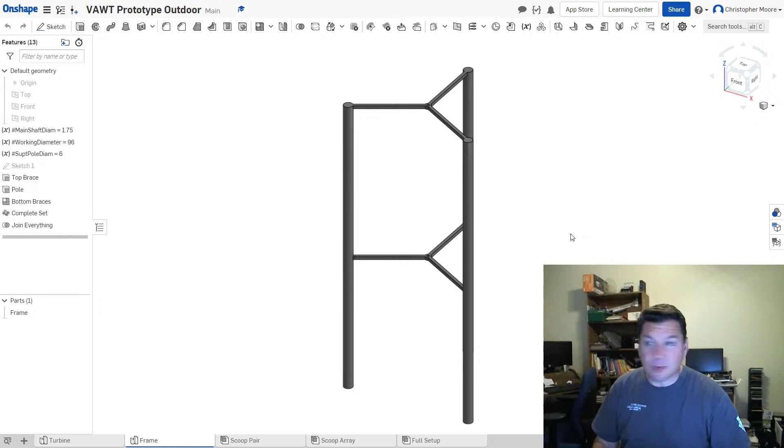Hi, Edwin. All right, cool. Number one what, Commodore? Number one to post something? Or number one as in you like the Harmony Turbines project and it's number one in your heart? Well, you weren't the first to post because Edwin came up first saying hello and that I was coming through loud and clear. So you were number two, Commodore. That's okay. We need number twos just as much as we need number ones. So Edwin gets the prize, the coveted honor of being number one tonight, first to post.

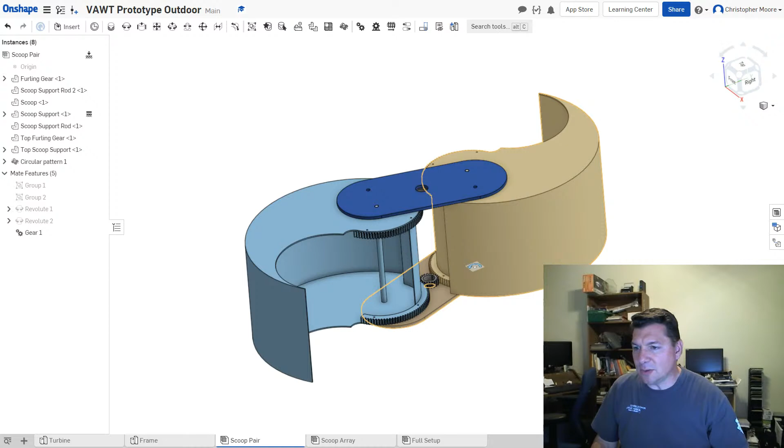Terry, hello. All right, well, I'm going to get started. I wanted to do a live stream tonight. My intent is not to go talking for an hour and a half, but who knows? You know me, I get to chattering and things get out of hand and then it gets crazy. So I wanted to share the first glimpses of the new outdoor prototype development.

I'll give a little recap for those of you who didn't get a chance to watch my other live stream the other night. I have already submitted my request to the township here in the area where I live, and asked them if it would be okay to put this turbine up, a permanent outdoor prototype, in my front yard.

The reason I'm asking for the front is because we get northwesterly wind many, many more days out of the year than we get any other wind. So to capture that northwesterly wind, it would have to be in the front yard. I don't think they like that quite as much as me asking for it in the side or backyard, but they said they are going to consider it because of the wind issue.

So I submitted my paperwork to them last week. They are going over it now. I've already got the new Harmony Turbines LLC paperwork into the state, so the state now has all of my stuff. My EIN, employer identification number, has been filed for Harmony Turbines. So we've got the state paperwork, the federal paperwork, and the township paperwork to be putting up a turbine.

I've also begun work on StartEngine.com. StartEngine.com is who I believe I'm going to go with for equity crowdfunding. And if you don't know what equity crowdfunding is, I would encourage you to take a look at StartEngine.com's website, they can help you understand it. It's kind of like Kickstarter or Indiegogo, but instead of giving out items and selling items, taking pre-orders for those items and then selling them to people, you're actually selling a stake in the company. So if you guys would be endorsing and backing up Harmony Turbines, you'd actually be in for a piece of the pie, or have some skin in the game, whatever the phrase is that you use.

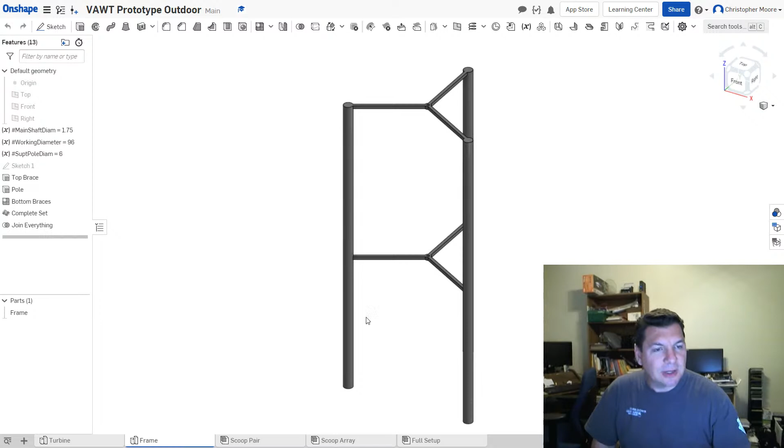So here is the frame. It's just a frame. The support beams here are probably 6x6 steel, with a 6 inch diameter pole support. This will be like 2x2 square stock holding up those two pieces in the middle, and I will probably need some diagonal supports in here, maybe not real big, but a little bit of diagonal support to help hold the lower central support up.

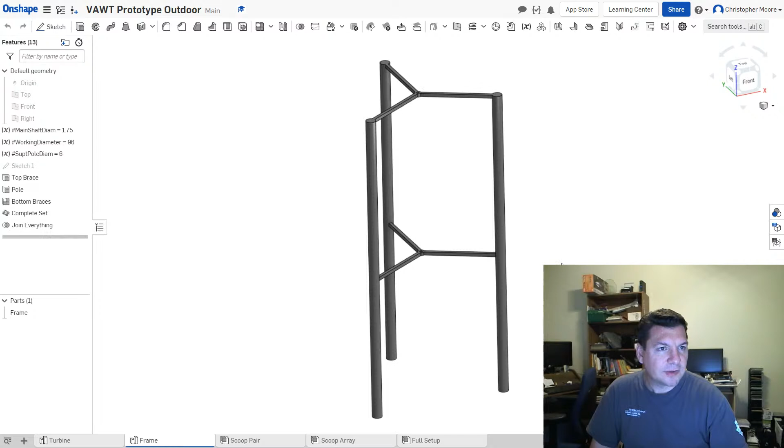So that is the frame, and then you're really going to like this. My scoop pairs, which I was showing when I started the live stream, these are the brand new scoop pairs. Terry, I might be tapping you to help me do these because I'm looking at maybe making them out of aluminum, since aluminum doesn't rust. I understand there's a little bit of a problem with corrosion if I get it up against other metals like steel, so I'll need your advice and help there when it comes to dissimilar metals. So these are the new scoops.

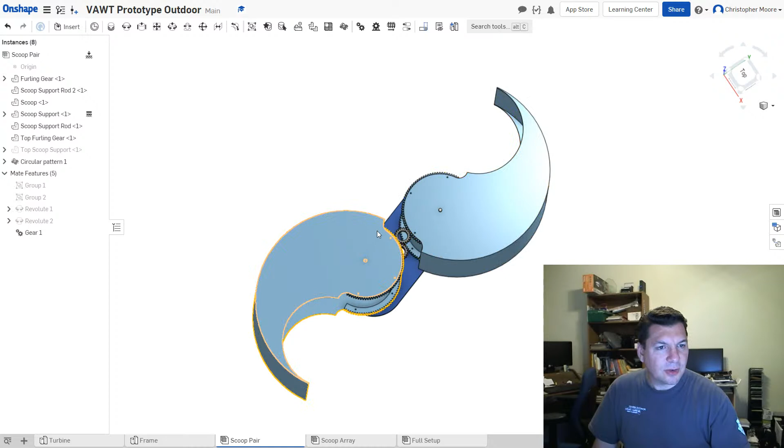They are 3 feet, so they're 50% larger than before, 3 feet tip to tip. Let me hide this top piece and I'll show you guys. If I close it up, it's easier to envision in your mind. So tip to tip, they're 3 feet, 18 inches tall, so 1.5 feet high, 3 feet in diameter, and they are beautiful.

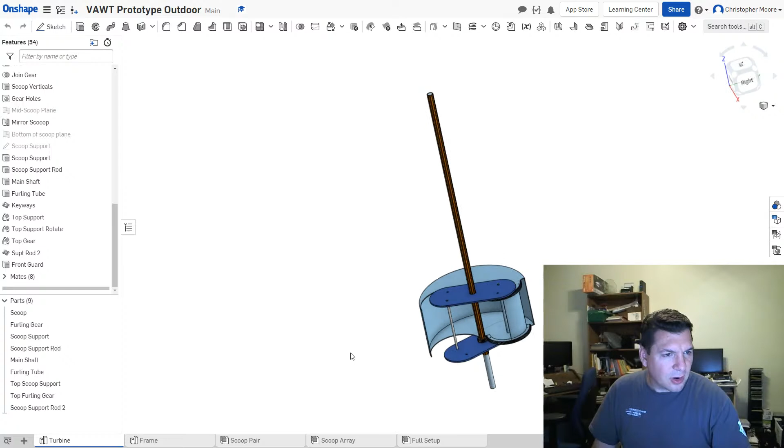There's also a new feature that I've added here. You'll see that front scoop has what I'm calling a wind barrier or wind break. What did I call it here? Front guard, I just called it a front guard, and that guard on there is movable. If we're looking at the scoop pair, let me hide the one so I can show it to you better.

Isn't CAD amazing? I freaking love CAD. I learned how to do it just two years ago, maybe two and a half years ago I started. Could have even been three years ago, but I was horrible at it. I played a little bit with SolidWorks, but since I got Onshape, Onshape.com is amazing, and it lets you do so many cool things with it.

This wind guard that I have, the front guard, what did I call it? Now I can't even remember, I just said it a second ago. I am so bad, I just called it a front guard. It's like a football player.

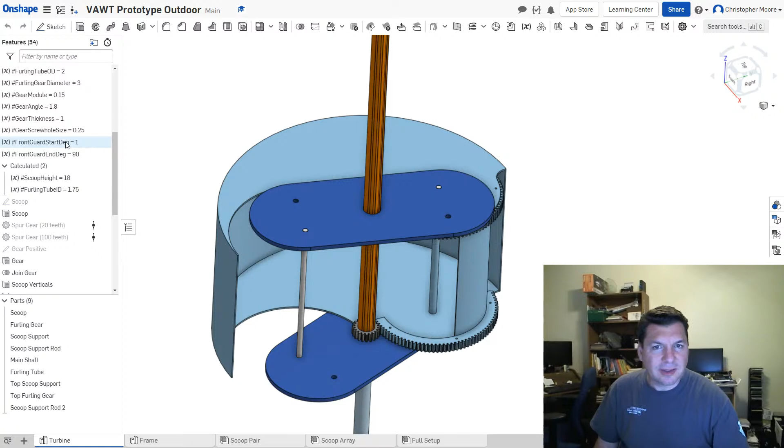This thing, I have it on parameters, so I can move it around at will. Right now I have the front guard starting degree at 1, so that means it's 1 degree off of the edge of this gear, and on the other side, if I had the ending degree set to 1 degree as well, then this guard would go all the way over. So right now, if I set this at 1 degree, the front guard would fill that entire front space.

Thank you, Terry. So see how that front guard now, by me changing that one parameter, has just filled that entire front space instead of just 90 degrees. But if I undo that, I have it only filling half. So the cool thing about this, by parameterizing things, I can play with this guard.

I could say 20 and 90, and then it would make that front guard just be that little bit. It would start 20 degrees off of the edge of the gear over here, and I have it ending 90 degrees off the edge of the gear over there. So I can move this guard around wherever I want.

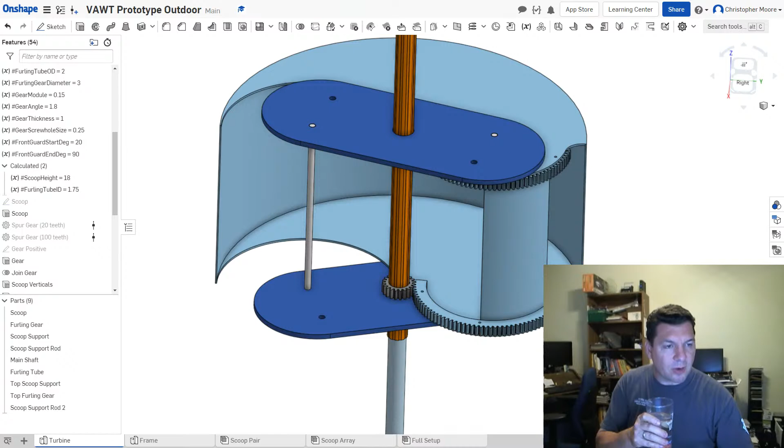My intent was to play with it visually, and then maybe one day when one of you guys who's really good with computational fluid dynamics, CFD, is able to help me out, I'd love to do some CFD on this, and we can find out where the best position is, how big to make that front guard, what angle to put it at. I do think we need one in, so right now my best guess was about 90 degrees, starting at the edge of the gear to there.

And the reason I did that, let me unhide all the instances here, is because as it spins, if we imagine ourselves being the wind blowing straight in here, as it's spinning, we get too big of a gap if we don't have some kind of a guard in there. So the pole is going to be in here now, so you're not seeing the pole.

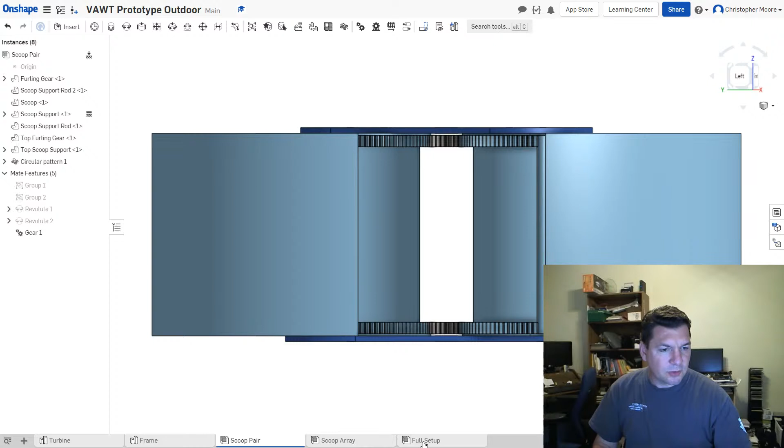Actually, let's move over to, oh my, get ready for it, guys. Here it comes. Woohoo! Look at that. Oh my goodness. That's the full scoop array. And what I was playing with here is just what looks good for that front guard.

Oops, that won't work. So if I animate this right now, I was trying to figure out what optimal angle to have that, how big to make that front guard, but I need to fill in that gap a little bit when that front guard's in there. And see here, harmony spinning, that would be like an incredibly slow, like half-mile-an-hour wind or something. Nah, maybe that would be like 1 mile to 1.5 mile an hour wind.

But if I zoom in on that, you can see that guard is helping to funnel the wind around there correctly. So I'll try not to rotate it too much and make people seasick here.

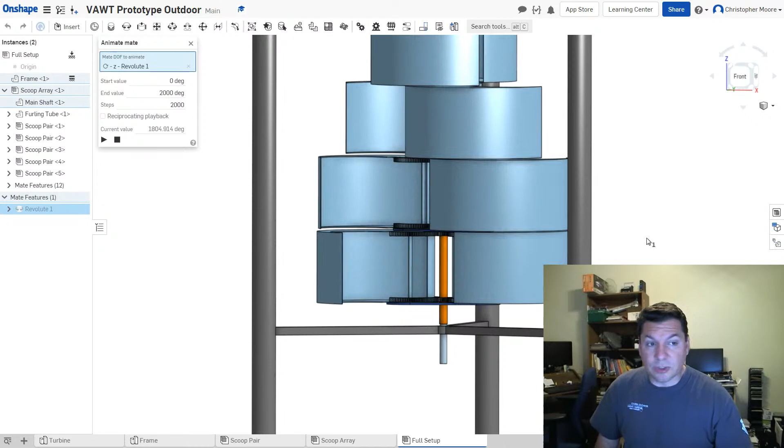But computational fluid dynamics or real true field testing is going to be the only way to determine what my optimal setting is for that front guard, where to put it, how to position it optimally. Maybe it needs to be back a little bit, maybe 20 degrees off of the one side of the gear, or coming closer to the other side. Who knows? But I've got the easy parameters in there.

In fact, in the field, what I could do is just put some screw holes in the back of the gears and then have that guard actually movable so that I could replace it and put in different guards once we do computational fluid dynamics on it, and we could see through CFD what appears to be the best placement for that guard. But I do think we're going to need one in there.

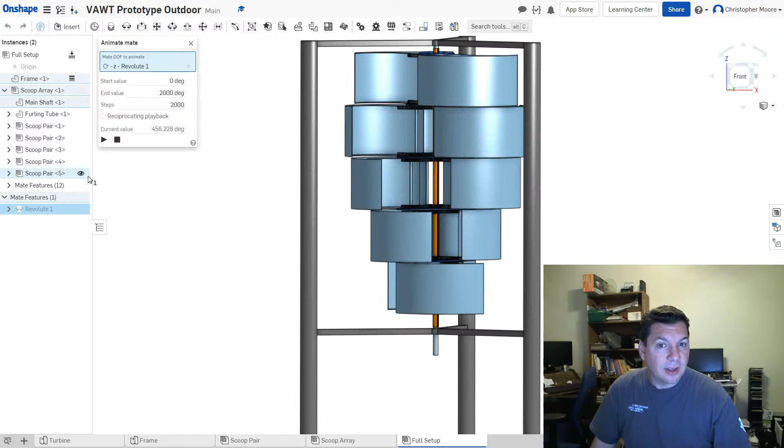So this is how it looks. Let's show you like more of a top view there. Pretty, actually really freaking cool. Straight down on top, that's what it would look like.

And right now, I've got it, if I would freeze this main shaft, and let's open these scoops up. So now they're open 100%.

Be nice if this remembered your last animate setting. Oh well, not a big deal.

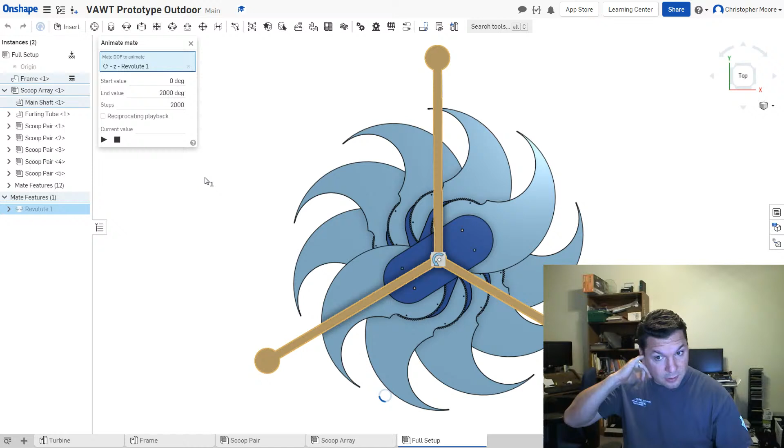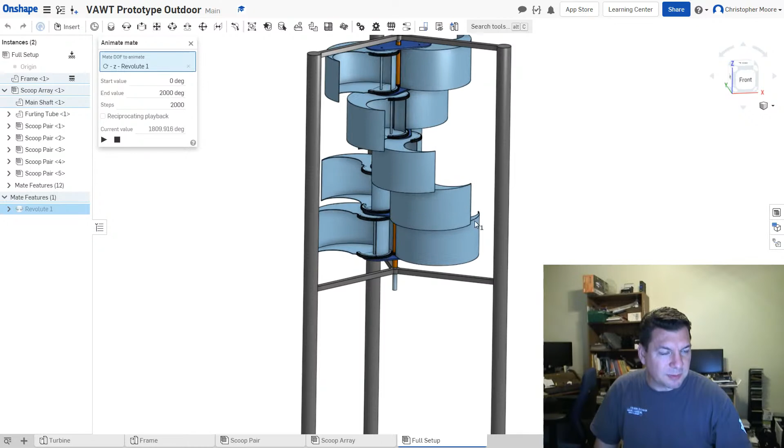But there's what it looks like when it's fully open. And if you're counting, you'll see that there are 5 scoops in there, guys. I've got 5 scoops in this array. So this is a 5 scoop array. It would be 7.5 feet tall, starting at the bottom of the scoops to the top. Actually, a tiny bit more than 7.5 because of the scoop supports in between, those dark blue pieces in between. They're a 1/2 inch thick each. Yeah, I think I made them 1/2 inch.

What's awesome about this rig is it's going to be permanent, sturdy, and hold harmony very rigidly. From the middle supports down to the ground is almost 8 feet of space, so I can mount whatever kind of crazy hardware I want underneath there, trying different generators and gearing ratios as necessary.

I keep bringing up the fact that I saw one guy who had a universal joint from an old car coming down off his center shaft at about 45 degrees, connecting to his generator. That's really cool because you could mount a generator right onto this pole for rigid mounting, then come off it to another generator, and just change the universal joint to test a third one. The universal joint was pretty neat, super low tech but a cool idea.

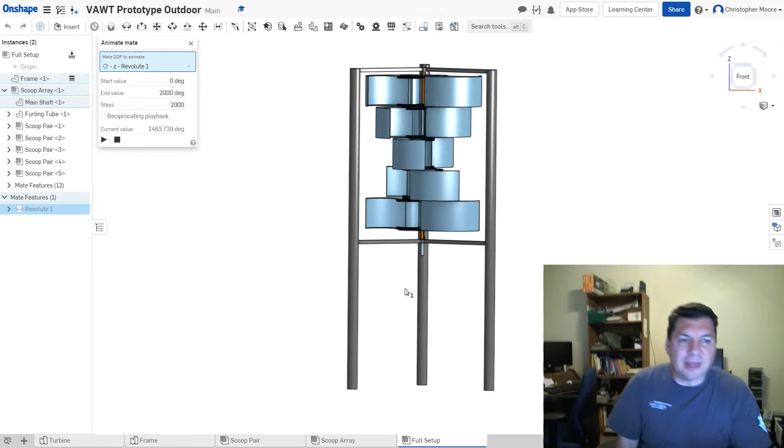The thing I'm excited about is all of the space down here, because I never had that before. In my other model, the white one I took outside, I had maybe 6 inches of space in there. It was painfully small down in that bottom area, not enough to really work with proper generators.

I didn't know it at the time, but coupling your turbine with a properly sized generator is a bit of science and a bit of art. It's not something you can just throw together and expect to work perfectly. Your generator spins at a certain RPM range where it's efficient, and the turbine spins at a range that's most efficient for given wind conditions, so coupling those two is very important. Then on top of that, your charge controller plays into it too.

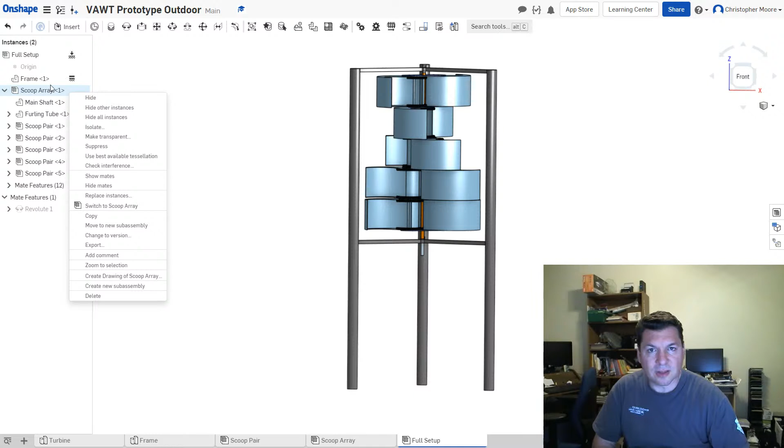So lots and lots of things play into this. Having the room and space down here with a permanent outdoor prototype is going to be key to making good, strong headway figuring out the final numbers and performance of Harmony, and all the stuff that goes into this.

Sorry, Mom. That was my mom calling. I told her earlier I'd have to decline because I'd be doing a live stream. Let me tell her quick. Told her she can watch me on YouTube if she wants. Anyway, sorry about that, I knew she was going to be calling, she was trying to get a hold of me earlier. Back to what I was saying.

Thank you, Mike. Let me catch up to a few comments here. People are saying, wow, it's cool, looks fantastic. Someone asks: do you know if the front guard will cause any wind noise as the wind leaves?

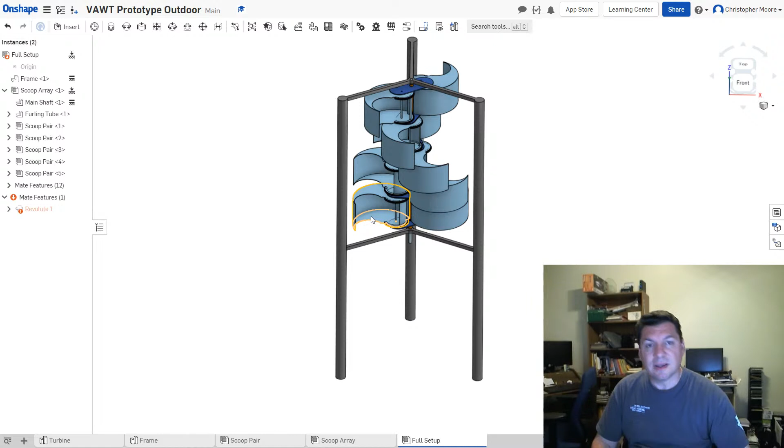No, Mark, at this point, no, because I haven't even built this model yet. In the white ones that I had, let me pull that up, I'll show you a quick video.

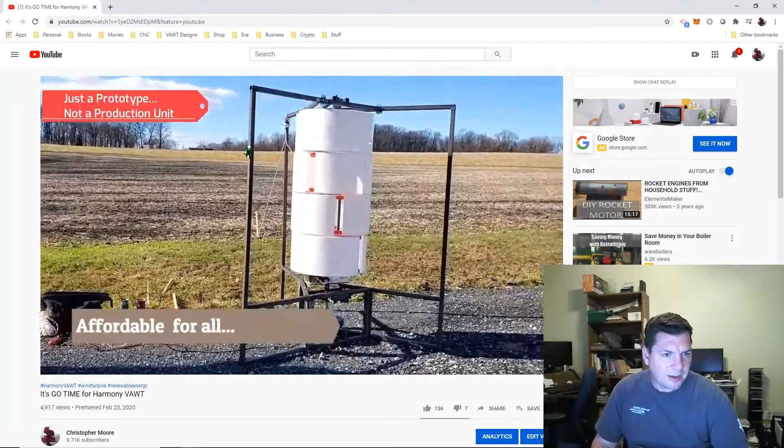I was thinking it was like 6 inches, maybe about 8 inches, but certainly not enough to mount other types of generators in there. It was barely enough to get just that one little pancake generator in there, no room to mess around and do other things with it. This scoop array, when fully opened, was 4 feet wide, 4 feet tall. The new one is going to be 6 feet wide, 7.5 feet tall, and that's really big.

Probably it's a little bit larger than I want to end up for a residential size, but it doesn't matter. I need a starting point. So if bigger is a little bit better because it's easier to work with and gives me more torque, that's fine.

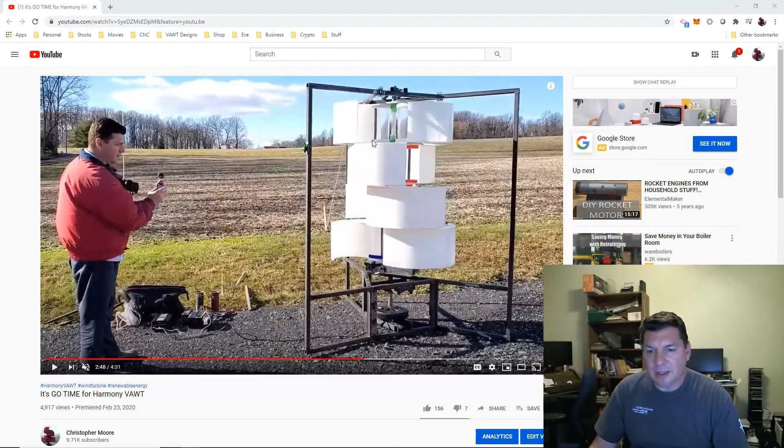I can play around with all different kinds of generators then. But in the old one, to answer your question Mark, that front guard was pretty much 180 degrees. It went from the beginning of the gears all the way to the end of the gears. And the new ones that I'm proposing, I am looking to keep them smaller. If I can get away with just 90 degrees, then that's what I'm going to go with.

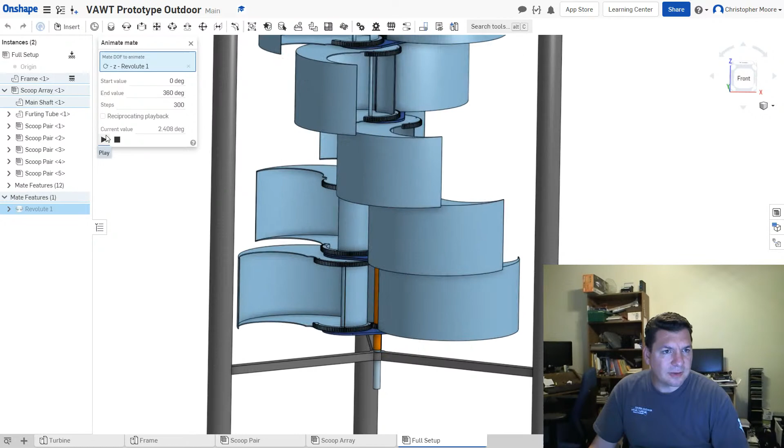The whole thing here, when you look at it as it's spinning, when it's fully opened, you don't have anything to worry about with that gap. So you really don't need a guard if you're just going to stay fully open. But as soon as we start furling, then that guard comes into play. When it's fully open like it is right now, that guard really isn't going to do much.

So that's why I don't want to make it bigger than it needs to be. That's why I'm not just going with a 180 degree guard, because I'm blocking a fair amount of this scoop that's catching the wind. I want to have it as minimal as possible, but still do its job.

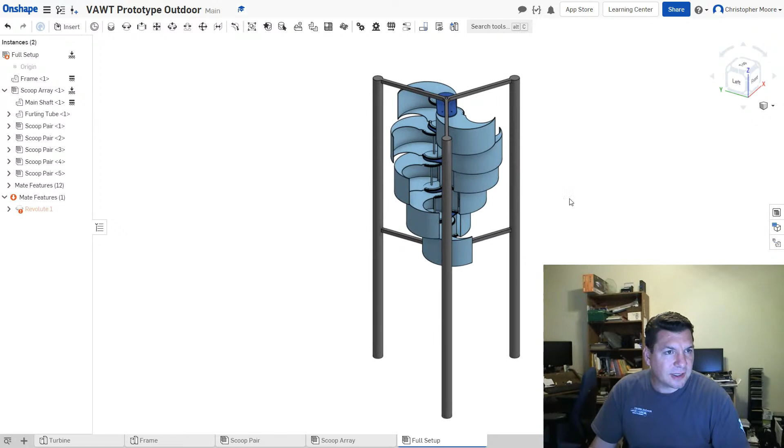Once I start furling, like if I would furl a little bit here, maybe we'll furl up just... that's like 80% opened right there. So it's only 20% furled. You'll see, if we get it at a certain angle, it's a little bit hard to angle it at the angle I want. There we go. You'll see how that really starts opening up that gap in the middle there. It really begins to open up that gap, and that's the problem.

Let me see if I can rotate it just a little bit. There we go. See, without that guard, there's really a very, very large gap in there. I'll take the guard away once, and you'll see what I'm talking about. It's a horrendous gap. If I suppress that front guard.

Isn't CAD amazing? Look at that. I just did what would take you 3, 4 hours to remove those front guards. Even if they were just in there with 2 screws, it would take you a while to get up there and unscrew each one carefully without breaking things. But see how much it's just opened up so much without that front guard. I think you'd lose a lot of efficiency in here.

That's why originally, as I was designing the tabletop models, those orange and white ones that I had on the dining room table, I thought, oh, I don't need a guard in the front. But I believe I do, because those tabletop models were fixed in an open-only position, 100% open position, the ones that I did the videos on. That's why I couldn't really see it. But as soon as I got it into CAD and started spinning it and having it furled a little bit, it becomes very clear immediately that you need to have something.

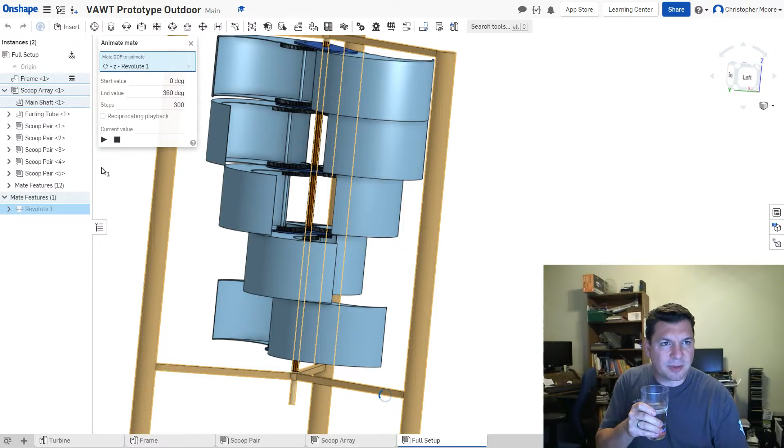I'll keep it at this angle so you can see. See how those big gaps keep opening? I think I'll try it without the front guard just to try it, or we'll do CFD on it as well, but I think you're going to lose a lot of efficiency there by that big gap. So that's why I have the guards on.

Thank you, Terry. So Mark, that was my long-winded way of answering your question. I don't know yet, but we'll find out. That's the beauty of getting to play with it. And Terry, yeah, I don't think it needs to be 180, but I think it needs to be probably somewhere close to 90 degrees, and then where exactly we position it, we'll have to play with that.

So that's the beauty of what we get to see here with CAD. Some of the other cool things I'll show you.

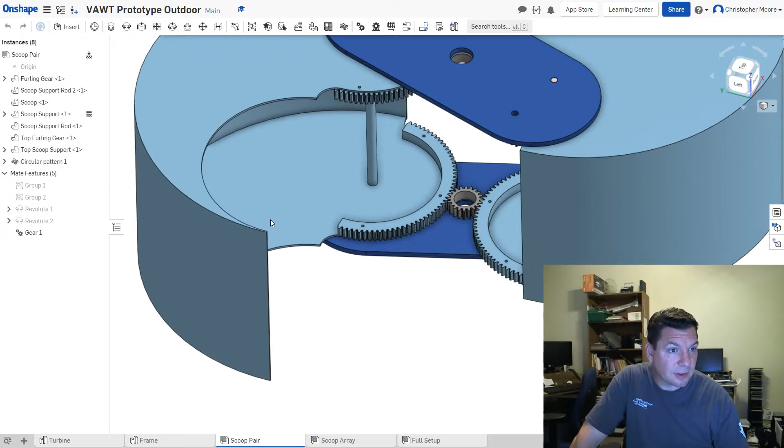Oh yeah, you can really see it there. I'm furled up like, in this shot, I'm furled up pretty heavily. I'm probably 60% furled at that point. So I'm below the halfway point. There's the halfway point of furling. I guess right there is exactly halfway at those two marks. And you can see that massive gap that you would get every single rotation, twice per rotation actually, you'd get that huge gap.

So if we add that guard back in, put the guard back, and then we look at the scoop pair without moving a thing, now you can imagine with that pull in there... no, I didn't have the pull in the grouping here.

Well, you can imagine with the pull in there and the furling tube, that gap is almost completely taken up. Almost. So I believe that's going to be a lot better with that guard. But even if those guards were 180 degrees, they wouldn't do anything more than what they're doing now, because they're already extending as far front as they can be. In fact, if they were continuing around to the front of the gears, I'll rotate it a little so you can see what I mean. If they were coming all the way around to the front, I think the guard would actually hurt more than help by being 180 degrees.

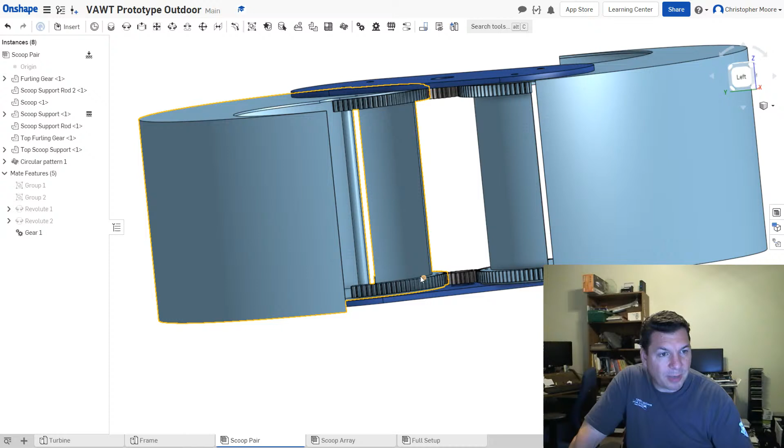So at 90 degrees right now, that wind is able to come into this spot right here and get caught for that moment as it's spinning. And computational fluid dynamics will help prove that out. But that's why I think a 90-degree guard is going to be best. We'll just play with where exactly we would position it. Maybe it could be slightly less than 90, like an 80-degree or 75-degree guard, but something closer to 90, much more so than 180 degrees, looks more correct to me.

All right, so with that guard in there, now you'll be able to see when it animates again. I haven't changed the angle of this shot at all from what it was when that big gap was there.

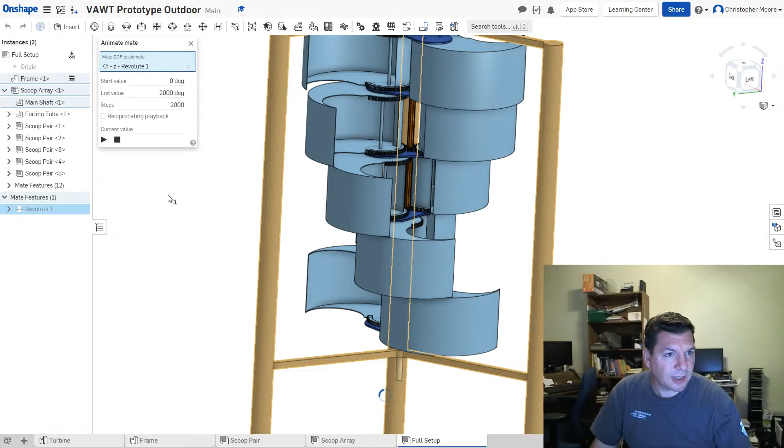And you'll see with that guard how much it helps to really close that up. So there's very minimal moments where you would have that air being able to get through there. I think that guard really does a nice job of both maximizing the scoop capture, the momentary scoop capture, whatever it would be called, and then giving us a lot of protection for any air that would have gone through the middle there. Sorry, I paused - I was just looking at the way that looked.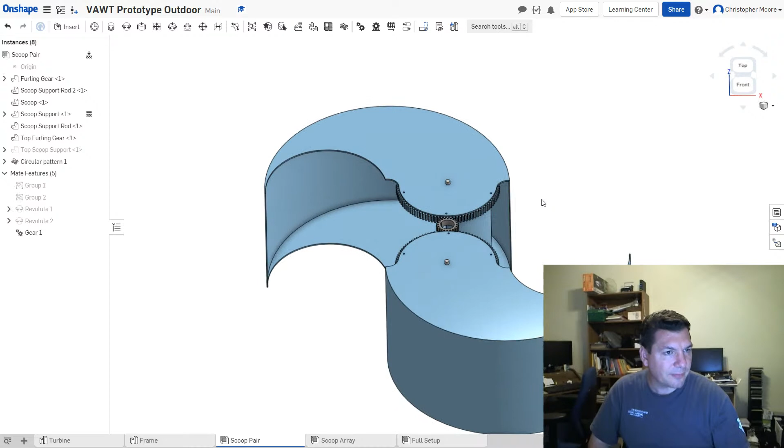And with the scoop pair, it's kind of cool too, because if I hide this top one and do a top-down shot, there's an interesting phenomenon - by having the back vent opened here, I believe we're also going to get some shuttling of air when you've got the scoops in about an 80% open state, or 20% furled state. I think as the wind enters one side here, if you follow my mouse, it's going to flow around because it follows the scoop. When it hits, it's going to flow around and shoot out this opening here, right here, like a vent.

And then it's actually going to shoot it into the other scoop. So that's why I don't want to make the guard any bigger - in fact, even at that degree, it's starting to block it. If it were more like that, then it would shoot out of that scoop and into this other scoop. So the wind would come in, shoot through, and come out. This actually helps to propel this back scoop, the one coming into the wind - it helps to push that scoop through the wind even harder.

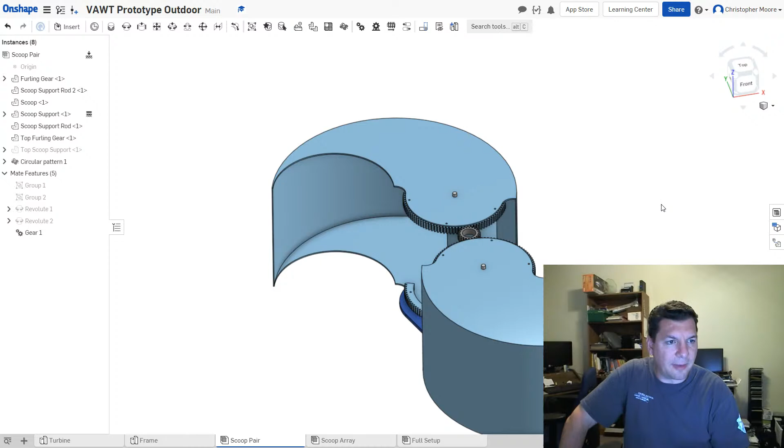That phenomenon has been noted by computational fluid dynamics and demonstrated in Savonius wind turbines for years and years. So we actually get to take advantage of that bit of a helping hand, if you want to call it that, because Harmony exhibits Savonius characteristics with these blade designs. It's both Savonius and Venturi effect fluid turbine kind of combined into one. I think Harmony is amazing, and I can't wait to start proving it to the world.

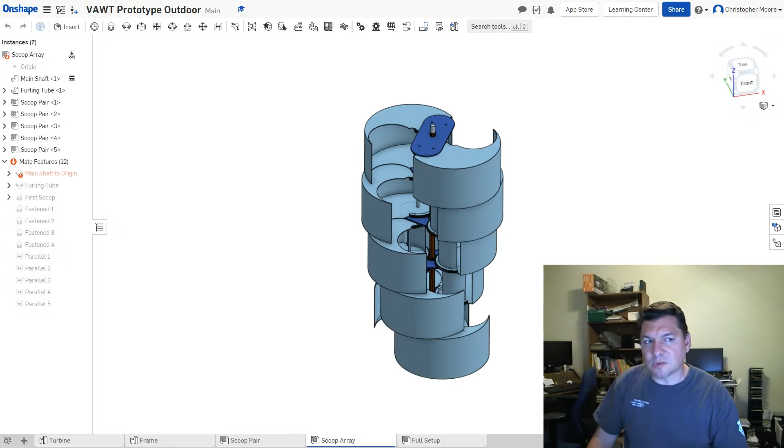But what I really want to see is when we have wind and we're producing, then I want to play with the furling state - opening it slightly, closing it slightly, playing with that front guard positioning - and see if we can get some really interesting numbers out of Harmony after we see what furling states appear to produce the best power output in given wind speeds.

So, if you could duct the wind into the cupping side and increase wind speed. Don, that is what I was just describing. Maybe you were coming in a little late, but I think that's what I was just describing to people - ducting it into the other side there.

Hello, Don, by the way.

So anyway guys, that's it in a nutshell. I didn't want to make this really long, we've already been on for over 30 minutes talking. It's a 5 scoop array, about 7.5 feet tall, 6 feet wide.

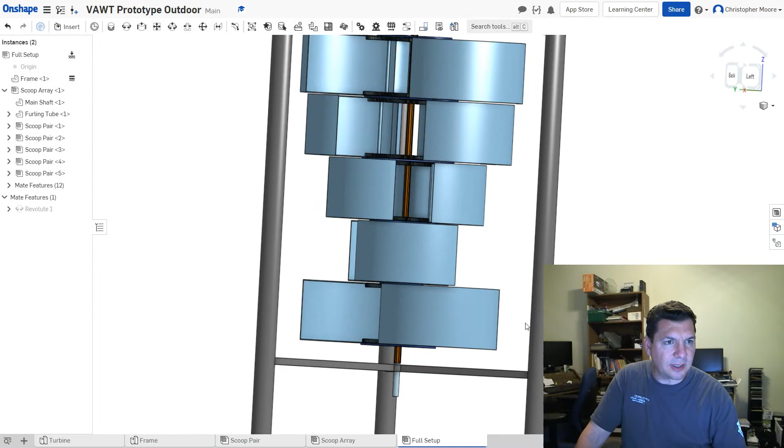When it's fully open, fully unfurled, I will put it back into a fully open state one more time and show you, for those of you who might have joined late. So there it is, fully opened.

And if we get the cross section, there we go, where it's not being obstructed. So this scoop right here at the top and the bottom are about fully perpendicular to me. It would be, or tangent to me, I guess that would be tangent.

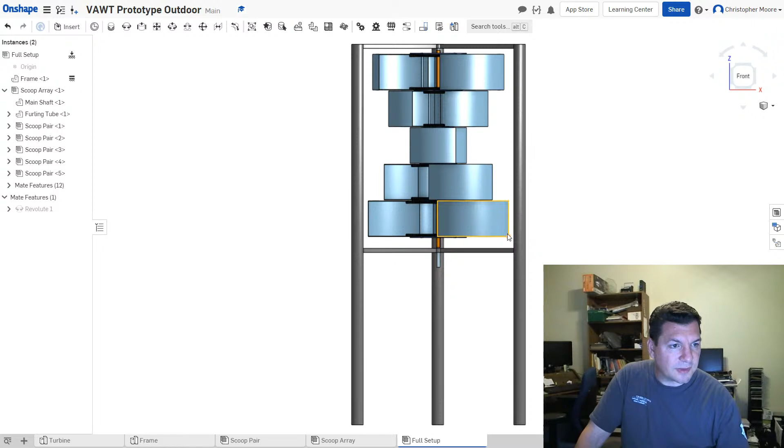These will be from tip to tip about 6 feet across. So 6 feet across there. The poles themselves are mounted on an 8-foot diameter to give it enough room so that as it's spinning, we don't get anything hitting. So you can see it spinning from the top. So nothing will hit.

That's fully open, that's as big as it can go, and it's still got plenty of room in there so that it won't hit anything. And then we have plenty of room down below to play with Harmony.

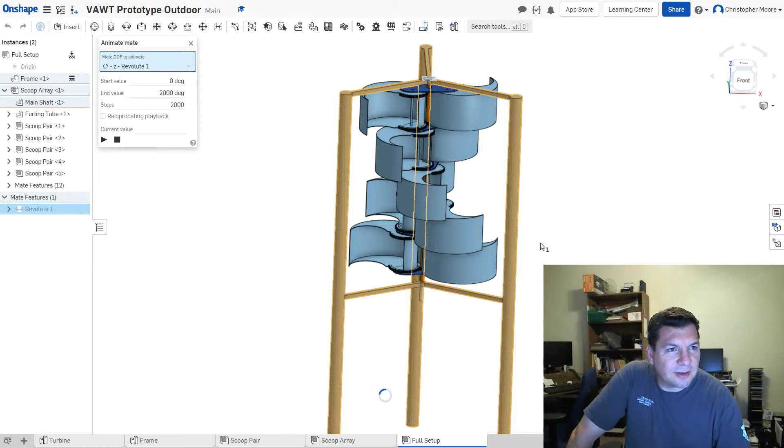I hate this, gotta make it bigger so it doesn't stop. So I'll have to send in a feature request and ask Onshape to remember your degree for the animate.

Anyway, so we have all that room down below to work and mount generator and any type of gearing or pulleys, whatever we want to do in there. So you can see it's got plenty of room, and it should give a lot of rigidity with this frame structure.

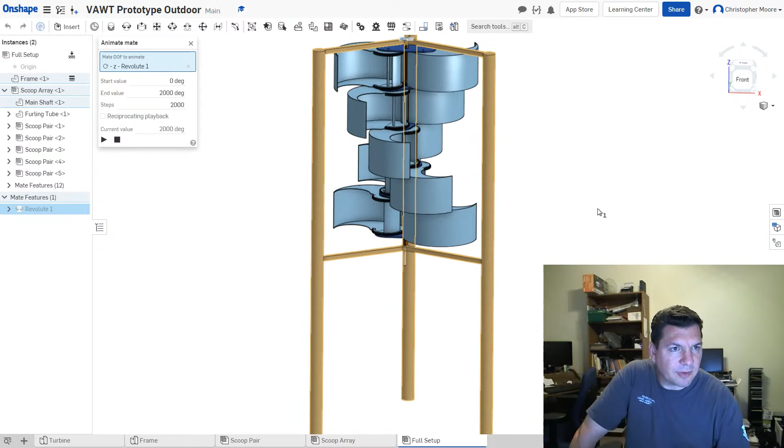And like I said, I'll probably put 45-degree supports in here, maybe 8 inches down or something, and have it coming up to about the middle, something like that, just to give me some extra stability for the weight of Harmony, of the turbine scoops, to take care of that extra weight.

These gears are going to be, I believe, I'm going to water jet them. So we'll cut the gears out with water jet, and I think water jet will actually be able to give us enough resolution that these gears will be just fine in this. By making it larger, believe it or not, things like water jet now become the perfect choice.

I don't have to actually have parts machined for an expensive milling operation. We can just water jet these gears right out of 1-inch aluminum or 1-inch steel, whatever we decide we end up having to make them.

I'm going to try aluminum first. I think aluminum will be fine, but we should be able to water jet these gears right out, and that's slick. When you think of that, that really, really, really will cut down on manufacturing costs and everything.

We can water jet those gears out, then we can just drill and tap these holes. Well, the water jet can put the pilot holes in, and then we can just tap them. So when you think about how freaking cool this would be to manufacture and get into low volume manufacturing.

Because we're just initially going to be making enough that we can do the testing we need, and then maybe get a couple out there to some of the early investors who paid enough that wanted to be a beta site. Low volume production where we get a couple of these out, probably a dozen or less, and get these out in people's hands so that they can start testing and validating data and performance and production and everything like that.

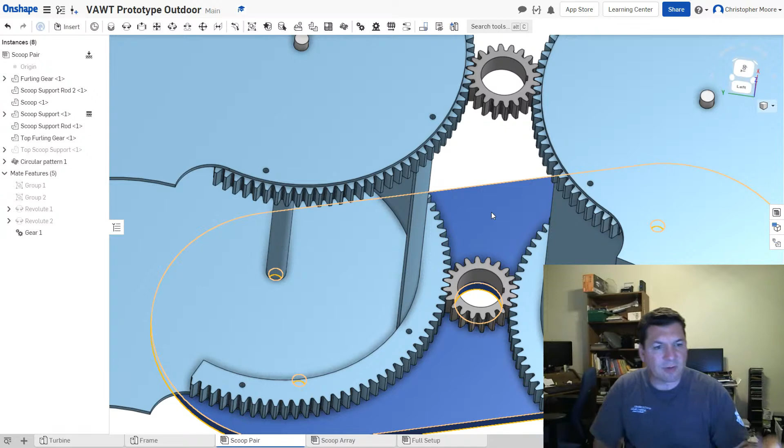But by having these gears as large as they are now for this new version, yeah, it's really exciting because we can just water jet those gears, and that's pretty sweet when you think about it.

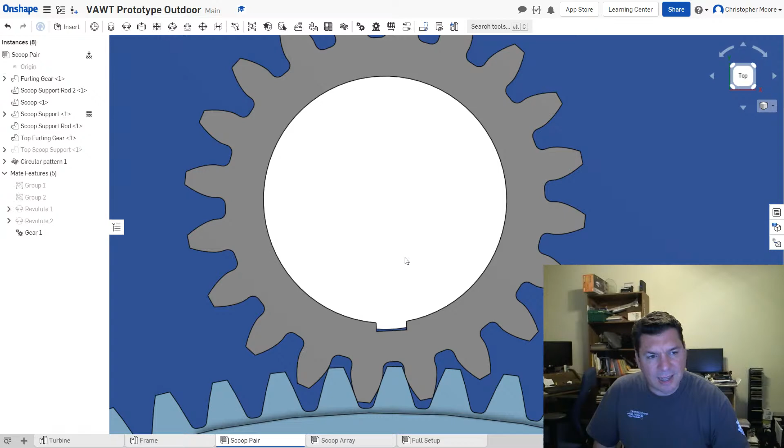We'll probably still want to broach that keyway just because that's a very delicate thing, and I don't think water jet would give us quite a sharp enough result there if we water jetted that keyway out for the furling gear. I believe that's going to still be a broach process because I didn't want to make that keyway too deep. It is right now a 1/4 inch wide and 1/8 inch deep into here.

Obviously the other 1/8 inch, if I go into the scoop array and look at it from the top, let me hide a few parts here, hide the furling tube.

Hide the main shaft. There we go.

Now in the real one, there's not going to be 5 keyways in it. I just do 5 keyways because it gives me, in CAD, a way to attach each of the scoops onto their own keyway.

So I did, maybe it's only an 1/8 inch deep. I'm sorry, I was saying the wrong thing. So that's a 1/16 of an inch in the gear, and then a 1/16 of an inch in the furling tube, to give me a total of 1/8 inch deep key by a 1/4 inch wide key. So the keys should be sufficient.

The furling gears are going to be taking some torque, definitely, especially in higher winds. But I didn't want to cut away too much meat here, coming in a whole other 1/8 inch. That would have brought this keyway down to here, and I didn't want to hurt the integrity of that gear that much by getting a 1/4 inch by 1/4 inch keyway. So I stuck with an 1/8 inch by 1/4 inch keyway and a key.

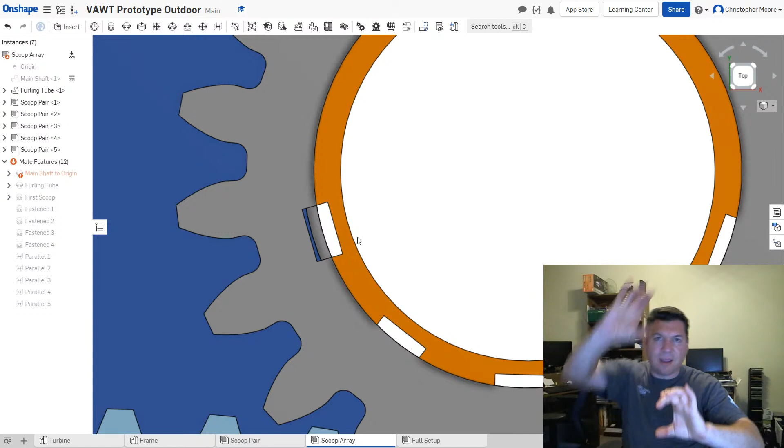And then 18 inches away for the upper keyway, it has it, and that just repeats. So the tube will have all of the rest of the rigidity and integrity fully intact, and just the small portions where we cut out the keyway are the only places where we disturb the integrity of it.

Terry, I'll see you tomorrow. Take care, thank you for joining. Michael, I know you want to test one in Tasmania, so we'll see how we get on with investments and see where we go from there.

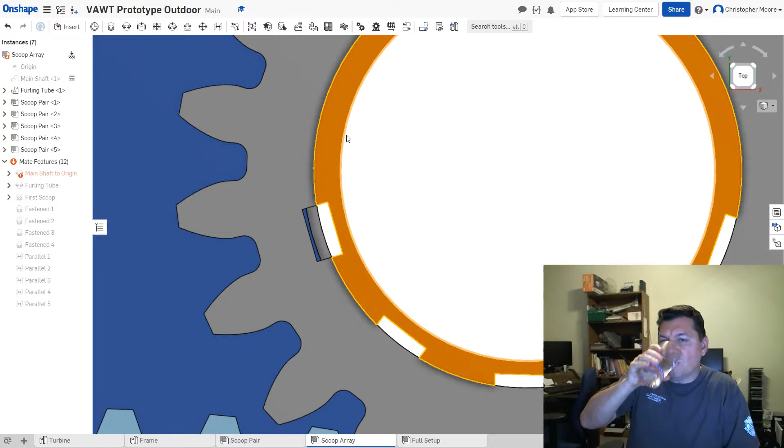Don, let me read your thing. Ducting the wind into one side only. No, Don, no. Let's back away from that idea.

People have tried to push me into that for a long time. There's all kinds of inventions out there where people are doing big ducting, heck, I've seen people using plywood to duct it into everything. You can't do that without destroying the beauty of what Harmony is. When you see Harmony rotating and spinning, it's beautiful to look at. And in my opinion, clean energy should be beautiful.

It should be something that people want in their front yard or on their roof, around their kids, not something they're having to hide away and put out in the mountains somewhere where they don't want to look at it, and then pay for someone to pipe it back into their house and pay for distribution and all that. Harmony should be beautiful.

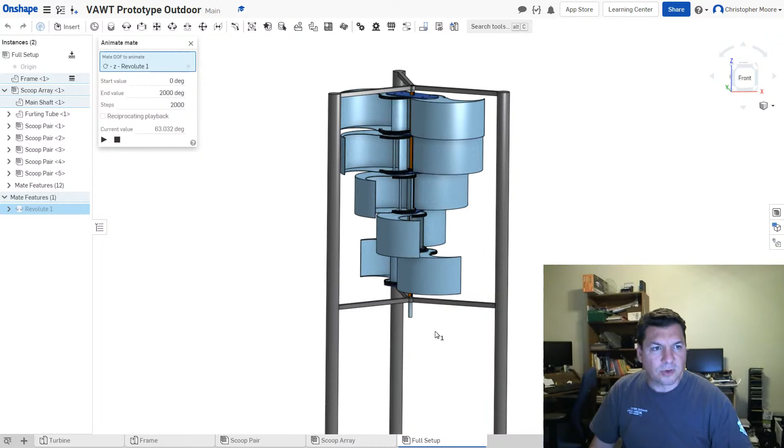In fact, I don't even want to have a frame around Harmony if it can be helped. Once we get into production, I'd like to start testing on making whatever support tubing coming up to the center sufficient enough that Harmony won't need any frame around it at all.

So absolutely not, I'm not going the way of ducting anything into it, because if you try to put ducts around it, you've got to either put the ducting on a big huge swivel or have it permanent, and then you're having to guess where the wind is coming from to duct it in, or you get those ones I've seen where they have a whole bunch of ducts all around and you can't even see the turbine.

Then you've got a big huge industrial piece of equipment in your yard and not something beautiful. Right now, Harmony, if that were spinning in my front yard, to me that's beautiful, and I don't want to destroy that. So thank you for the suggestion, but I am absolutely not going in that direction.

If you want, I can send you a couple links of people who are looking at doing ducting and playing around with that. I believe they have 4 or 5 different models that I've seen where people are playing with ducting into vertical axis wind turbines. I don't think Harmony is going to need it.

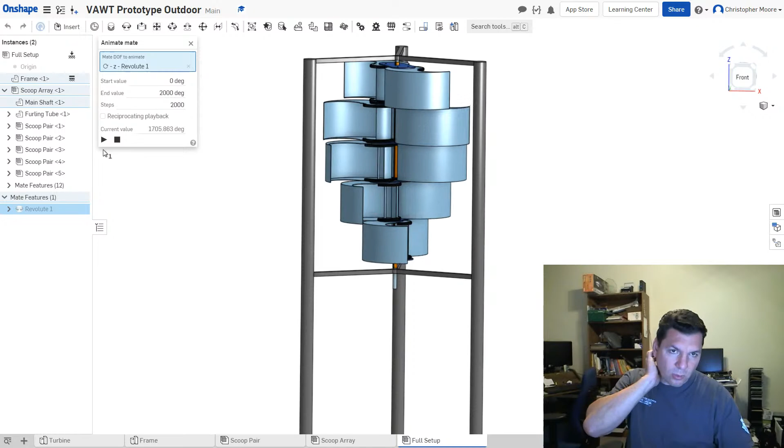I truly don't. From what I've seen already with the white model that I had and the performance that I was getting, yes, I didn't have it hooked up to a generator properly. I didn't have good wind conditions. Everything about those tests was pretty, I won't say it was pathetic, but it was pretty sad.

This attempt is going to be getting a much more substantial turbine, a much more sturdy turbine, and I think preserving the beauty of what Harmony is is just as important as it being a functional piece of electrical engineering or mechanical engineering product that you have in your front yard. So I'd like to hide the fact that it's really generating electricity for your house with the fact that it's so very beautiful to look at. People don't even think about it generating electricity.

What's wrong with more than one key? Nothing at all. I could potentially put multiple keys going around it, but I'm looking to disturb or impact that furling tube as little as possible, Mike.

So I'm just looking to put, for each scoop pair, there will have 2 keyways. In this case, where I've got 1, 2, 3, 4, 5 scoop pairs, then I would have 10 keyways cut into the furling tube. And each keyway is only probably going to be about 2 inches tall by 1/4 inch wide, and only a 1/16 of an inch deep. So those keyways are going to be as minimally invasive as I can get them.

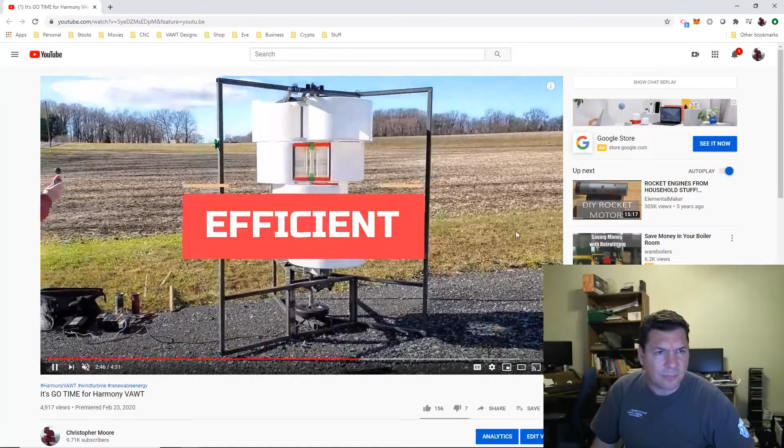Mike, have you seen, here was the white one that I had, and you can see it spinning. Let me back it up a little bit. Have you seen, stop me if you've seen this already, but here you can see it actually unfurling as it's spinning. So there it is, the last prototype that I had. It's actually unfurling, and you can see it picking up speed there. That was just in like a 1 mile an hour wind.

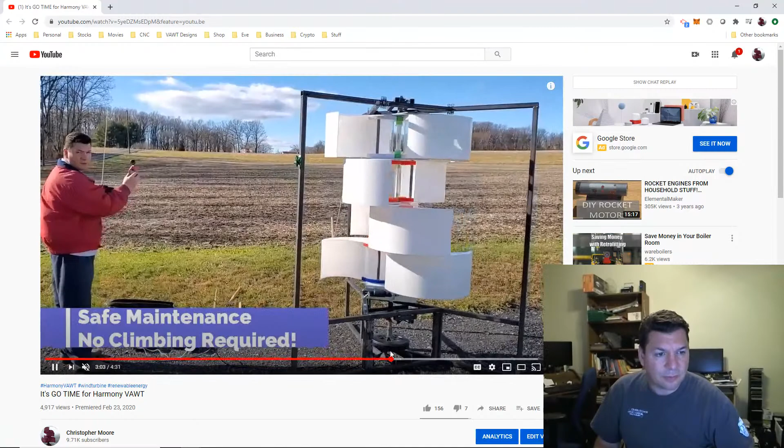So that process is what I want to really be careful of, not messing with that furling tube too much. I want to keep anything that's disturbing its integrity down to a minimum. And cutting keyways into that furling tube certainly does disturb that furling tube's integrity.

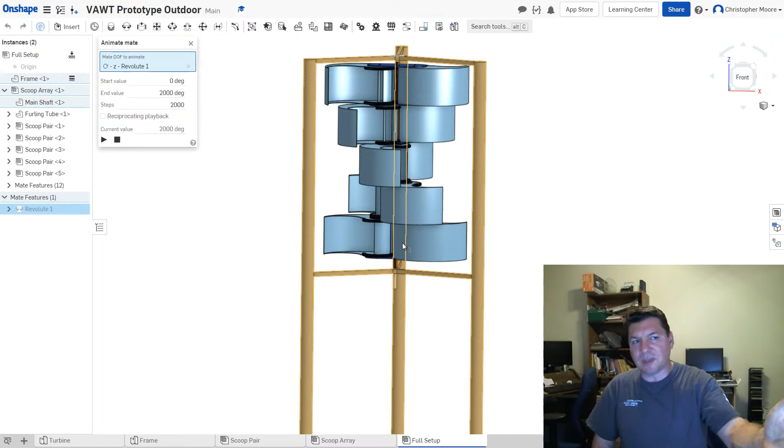The furling gears are only going to be moving when Harmony is either furling or unfurling, and it should only be doing that in little tiny bits at a time. Even in prototype mode, where I'm going to run an algorithm that's constantly going to be seeking, opening up a little or closing up a little, that's when it's going to be doing that. The only time it's going to be moving these gears - and what you're saying, because they're quieter, if we make them helical, that they're quieter.

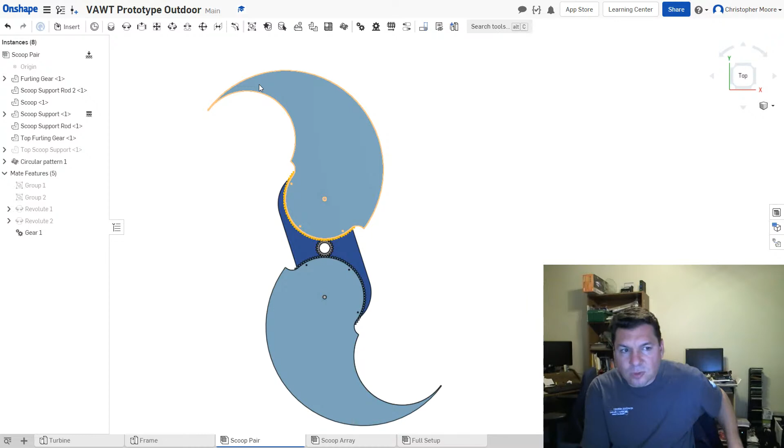Yes, I know that even helical gears are actually stronger too, because there's more engagement. But it's moving so minimally that even if you went from fully closed to fully open, you're probably only looking at a 30-second operation. Certainly it's not going to be furling and unfurling constantly in production operation at your house. It's going to sit there at one state for hours and hours on end, and then maybe move 5 degrees 2 hours later, and stay in that new position for another 2 hours.

So there will be very, very minimal noise coming from those gears, because they're not going to be moving 99.9% of the time. Those gears are going to be stationary. They're only used when Harmony demands that it be opened or closed a little or a lot, depending on what's going on. When it asks for those gears to furl or unfurl is the only time those gears are going to be getting used.

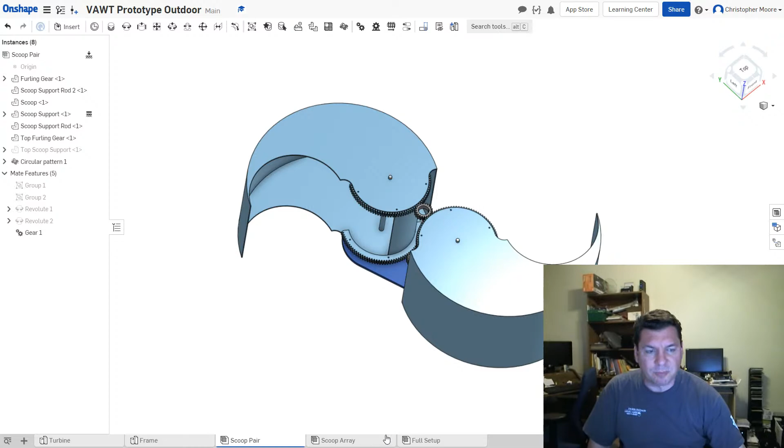A lot of people early on in my project were coming at me, yelling at me and stuff, because I put a plastic piece of PVC tube in this model. I put a PVC tube over top of a steel main drive shaft, using that as my furling tube. People were yelling at me like, there's way too much friction there, dude, you're never gonna make it, that's gonna burn up in the first 5 minutes of running, blah, blah, blah.

It's all bullcrap, guys. These are armchair critics that don't know what they're talking about, because that furling tube, 99.9% of the time, isn't doing anything. It's just sitting there stationary on the main shaft. The furling tube and the main shaft spin together. Here's another shot of the furling tube as I'm assembling it. The furling tube, the gears, the main shaft, they're all pretty much riding together as Harmony spins. The main shaft and the furling tube are all one unit for most of the time. The only time the furling tube spins on the main shaft is when it's actively opening or closing.

It can be spinning all day long, and as long as Harmony hasn't asked to be opened or closed at all, whatever state it's in, if it's fully open, it'll sit there all day long, and not a single drop of power will go into that furling mechanism if it doesn't need to be open or closed. That furling tube will be stationary on that shaft. So when it's spinning like this, those two are locked together.

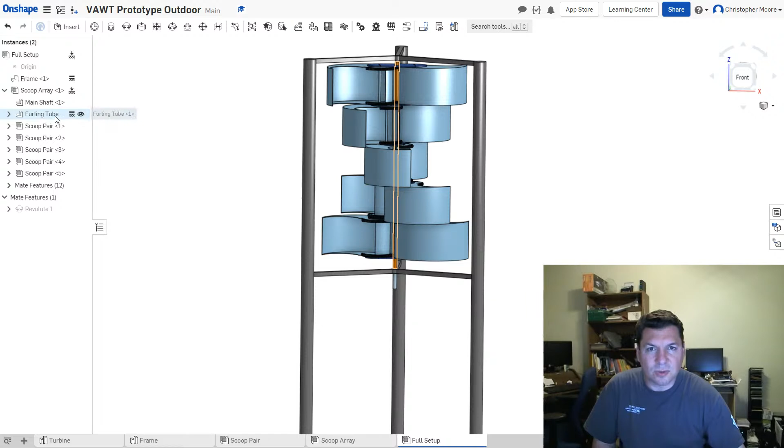Here I'm being silly, so I'll show you right now. I'm going to lock the furling tube, fix it in place. So right now the furling tube is fixed, so it can't rotate. If I try and close it, nothing happens other than the whole unit spins. I can't close the furling tube right now, or the scoops, I should say, because I have it locked. So the only thing Harmony can do right now is spin.

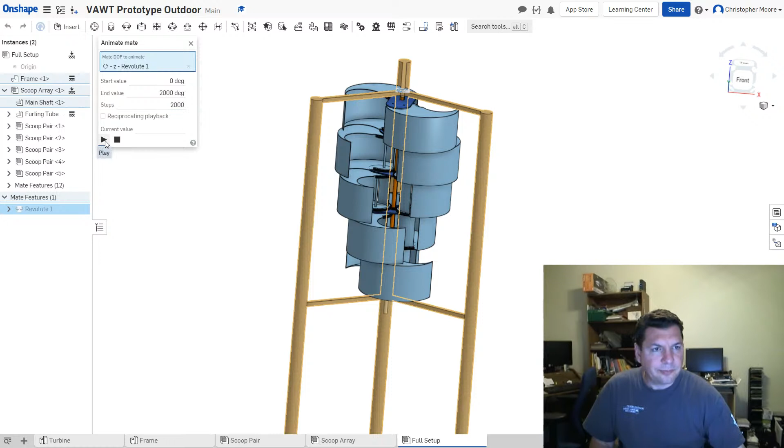You'll notice, even CAD doesn't lie, with that furling tube locked, it just spins. So there you go. Harmony is just sitting there happily spinning.

It's doing some weird CAD calculation because it's determining the max that it can spin based on the furling tube or something there. Oh, I know why, I'm sorry. It's fixing the furling tube, literally holding it still as the main shaft spins. So my bad, I can't fix the furling tube that way. What I could do is unfix it. Okay, I know what's going on there in CAD. It's fixing the furling tube in space, not against the main shaft. If I changed the mate feature of the furling tube, if I edit that... I don't think I can, because I would have to change this from a revolute mate to a fixed mate. Anyway, take my word for it: the furling tube does not spin on the main shaft at all, other than when it's opening or closing.

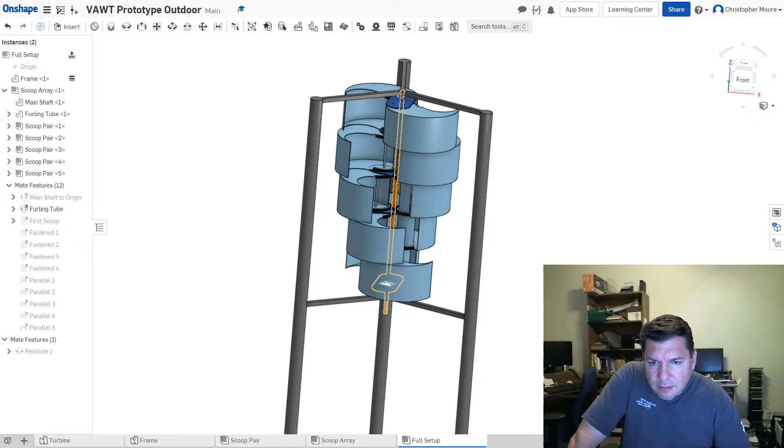Yeah, Mike or Mark, I do like it with 5 scoops very much myself. It's really, really kind of cool with the 5 scoops, and maybe it would be even cooler with 6 or 7, but I don't want to get too crazy right now. So, let me fix that. Oops.

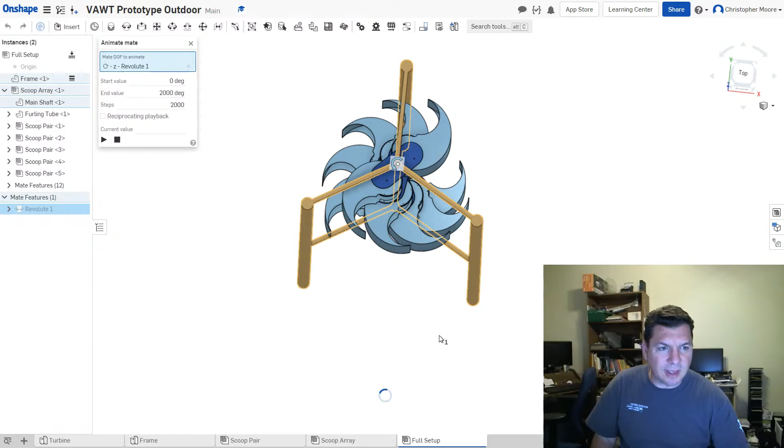I could put bigger values in there, but then it takes forever to do the calculations to even begin spinning, so it's kind of like a trade-off. If I put 5,000 or 6,000 in, the whole thing sits there and calculates for like 40 seconds before it even starts spinning. So I put 2,000 in, seems to be a pretty good number.

But there it is fully opened. And here I was going to show you with it like halfway closed. It's pretty cool. We'll do 50% furled once.

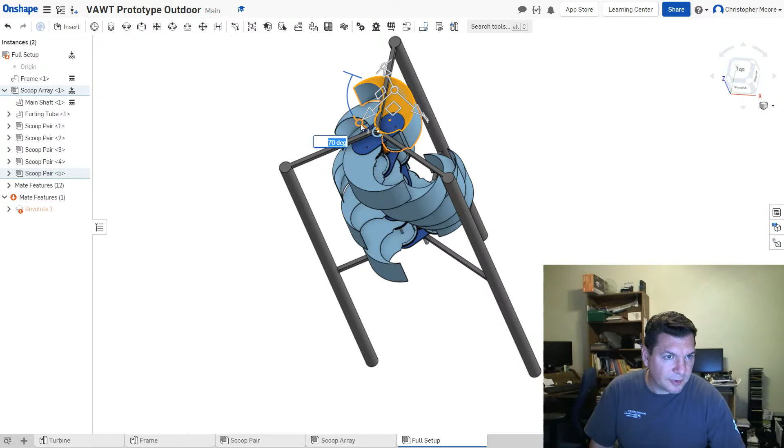Yeah, there's about 50. Right there is about 50% closed. I was looking for the little tiny drill hole down in there. So there's 50% closed right now.

It looks badass when it's beginning to furl. That's what I love about Harmony. I think we're going to find some amazing data here, guys, when we begin getting out there and testing different furling states in given wind speeds. We'll do 3,000, let it calculate a little longer. It's really, really awesome when we start getting into testing different furling states in given wind speeds. That's what I'm excited to see the results of.

Mike, the white one that I had, see there, it's 50% closed right now, or 50% open, whichever way you want to look at it. That to me is just absolutely awesome to think about.

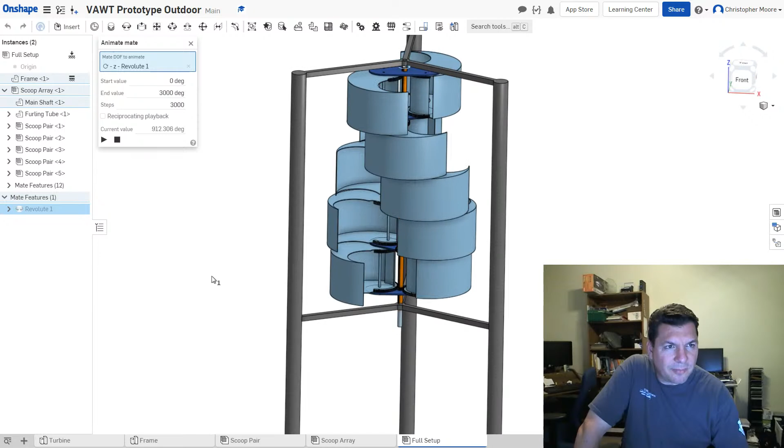Harmony is the only vertical axis wind turbine that has the ability to control its swept area to this degree. I'm sure there's some out there that have the ability to change the angle of their blades or something, but nobody at all has the ability to totally close up into a cylinder and get rid of their swept area completely. We have the ability to go from a 3-foot diameter cylinder to a fully 6-foot opened wind turbine, which is really, really freaking cool.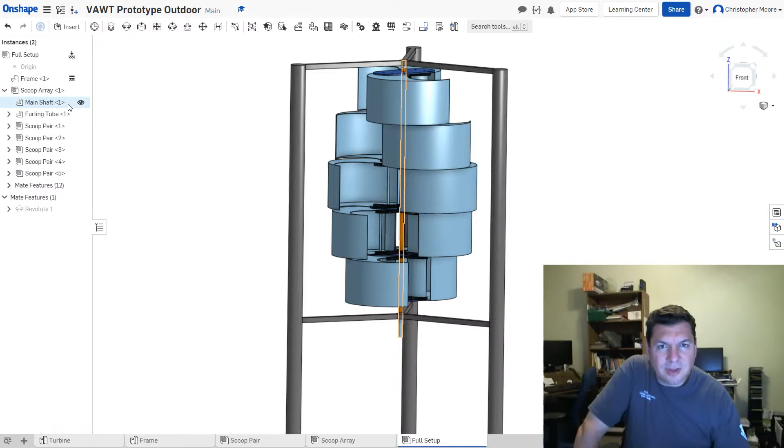Oh, for maintenance mode, by the way, here's what it would look like in maintenance mode. Like if you were actually doing work on the generator down below and you didn't want any chance of something happening where you could get your fingers pinched or something down in the gearing below or whatever you were doing.

It's weird that I can't grab that. I don't know why, it doesn't let me grab it. I have to use these tools.

There it is, 100% closed, which is really, really neat. If we look straight on, dead on, it's just a perfect cylinder. Now I know in real life it's going to have tiny little gaps because those scoops aren't going to mate absolutely pristine like they do here in CAD, but it's pretty neat to look at.

When you really think about how that can close up into a cylinder, there's your wind turbine in lockdown mode for maintenance. You'd have it furled up 100%, put a cotter pin or a locking pin through the main shaft to lock it so it can't spin, and then you can do whatever you want to the generator down here. Think of the safety issues.

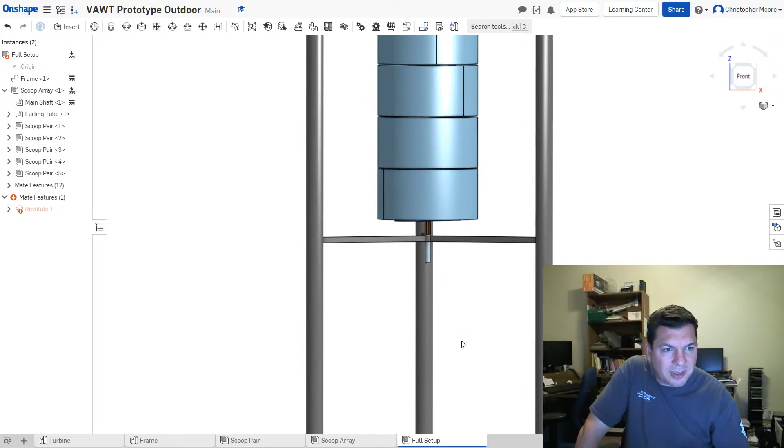I never ever want these to be so big that they become a menace to look at or for wildlife, but even if they were 300 feet tall, when you think about this, if you could close Harmony up, have it completely closed, and then put a pin in it to lock it, and then do whatever maintenance on it, it would be amazing because you could have a 300 foot tall turbine, and the place where you're doing work on it could be all the way at the ground because that main shaft could come all the way down to the ground, and then you'd have your generator equipment all on the ground.

That's like amazing when you really think about that. There'd be no reason, unless you needed to get up and modify or change something up there. But again, I don't even believe I just said that because I don't think that I want to see 300 foot tall Harmony turbines out there. I don't believe that I want to see that. So anyway, my thought is clean energy should be something we don't want to hide away from our houses. We don't want to hide away from society.

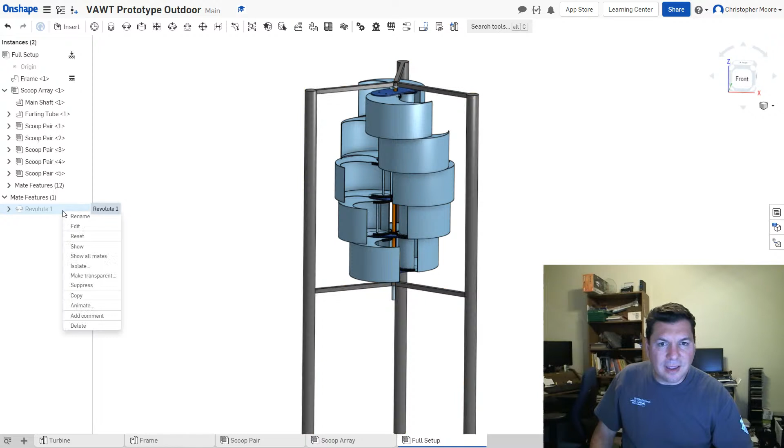It should be something beautiful to look at that you'd want right in your front yard, that your kids and your family can be around. It's not making any noise that's giving you headaches, it's not driving you and your neighbors crazy. It's something beautiful to look at and makes power for you at the same time.

Here we should get a little bit faster rotation with 2,000 steps and 3,000 degrees of rotation. This should cause it to rotate quicker, which is going to be a little interesting to look at. Slightly faster.

Yeah Don, this should be absolutely no danger to birds. It's a solid spinning mass in front of them. They're going to see it just like they would see a grain silo or your house or any solid structure in front of them. There isn't enough empty dead space for them to think they can fly through and then suddenly get cut off and hit. There's so much happening in front of them, they're just going to go around it. They're going to see it and fly around it because to them it will look like danger - Will Robinson, I need to avoid this.

The reason they don't avoid the big, huge 300-foot horizontal wind turbines is they don't even see that blade. It's so far away from them when they're coming through, they don't even see it. And by the time it hits them on the back of the head - they're not looking up when they're flying, they're looking ahead and down at the ground, straight forward or down. That blade comes and whacks them from the top because those blades are moving like 300 miles an hour or something crazy fast. And when it whacks them, that bird never even saw it coming. That's what kills the birds.

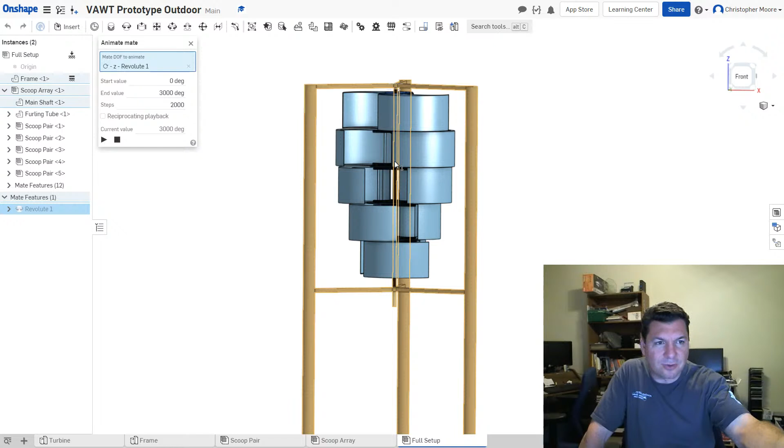Harmony, I don't care how big you make the thing - here I go again, talking about making it huge - but if it was made huge, it would still be a solid object in front of them. It would not be killing wildlife because they would simply fly around it.

Yeah Don, the high speed and hurricane areas are going to be amazing. I think once we start getting funding and testing - the Peace Corps from the Philippines contacted me a year and a half ago. A rep asked me if I would consider licensing it to them for their typhoons. They didn't want to generate electricity with those units - not that they wouldn't, maybe they'd have some hooked up for that - but they wanted to pump water with them. So they would have the Harmony scoops with their furling capability hooked directly into water pumps and be pumping water.

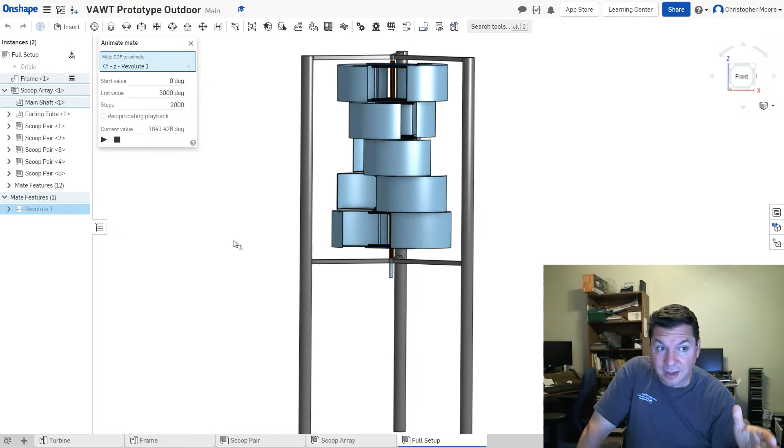Because as long as it's not freezing rain, just normal rain, you could rain on this thing all day long. In fact, it would probably spin even more powerfully with driving rain because rain is so much more dense and the water hitting it would be so much more dense. So Harmony would just be furled up to whatever degree it needed to keep it spinning within a safe RPM range. But really, my theory is this sucker would keep right on spinning right through that hurricane or typhoon.

And yeah, in those cases, maybe you are going to need a full cage around it, exactly like you see here. You might need these around Harmony in hurricane and typhoon areas. But I don't believe there's any other turbine out there that would be able to hold a candle to what Harmony will be able to do in those high wind situations.

And face it, when you have those massively high winds, the power you'd get from these things - you could probably generate like 15-20,000 watts off of a residential size unit, if you had a powerful enough generator hooked up to it and the scoops and main shaft were made out of strong enough materials to withstand that kind of torque load. But imagine the wind power in a hurricane or typhoon - if the news crews were out there filming, and we've got 10 Harmony wind turbines massively spinning away, pumping thousands of gallons of water a minute, saving all these thousands of homes from destruction - that would be absolutely priceless to see. I think it would be really cool.

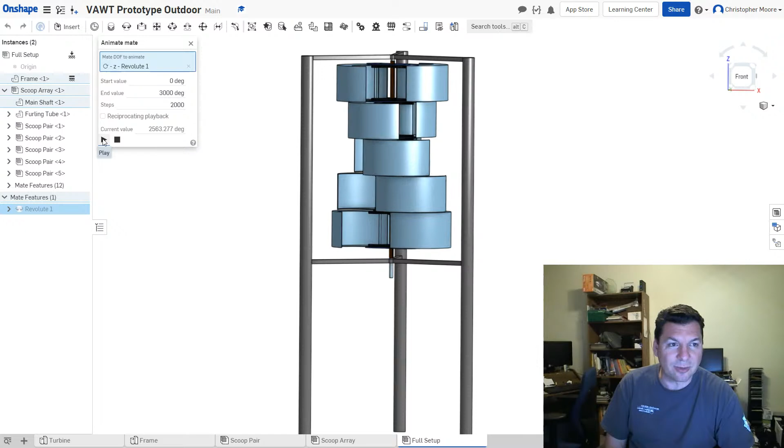Yeah, Don, that would suck. 90-degree temperatures, 13 days. I'm sorry that Harmony wasn't there to help you back then, but maybe if we all work together and get good seed funding here, maybe we can get Harmony out to the public in short order. I don't know how quickly that'll be, but we'll see.

Yeah, without power, that would suck. Excuse me, I have hiccups. Noctu, how are you? Where are you from, Noctu?

Could this work in water, like in a river? Sure, water is a fluid just like air. It'd be hellishly powerful in water, but I think it would be fine. You'd have to make them out of stainless steel or something so you didn't have to deal with rust, and you'd probably have a problem with sediment getting into the gearing. That could be a bigger problem than anything, like snow and ice is a big enough problem to think about. One day, when we get enough funding, I plan on throwing an engineering team at it and saying, okay guys, solve the problem of snow and ice. Where do we put resistive heating in Harmony to melt the snow and ice off the gears and out of the scoops? But there wouldn't be anything you could do about sediment and silt building up in the gearing, so that may be a killer.

However, here's a thought: you probably wouldn't need to worry about furling underwater. You'd just find the optimal setting for the speed that river flows, because rivers are pretty consistent. Even when running high in flood conditions, I don't think they run much faster — they're probably still close to their same speed, because river speed is a direct function of the drop, not the volume of water flowing through. So Harmony probably wouldn't even need furling capability underwater. You'd just set it at the optimal furling state for the given water speed where you've placed it. So yes, I think it would work fine, but the furling mechanisms would be a problem — you'd need to negate them and have it at a fixed furling state for the river.

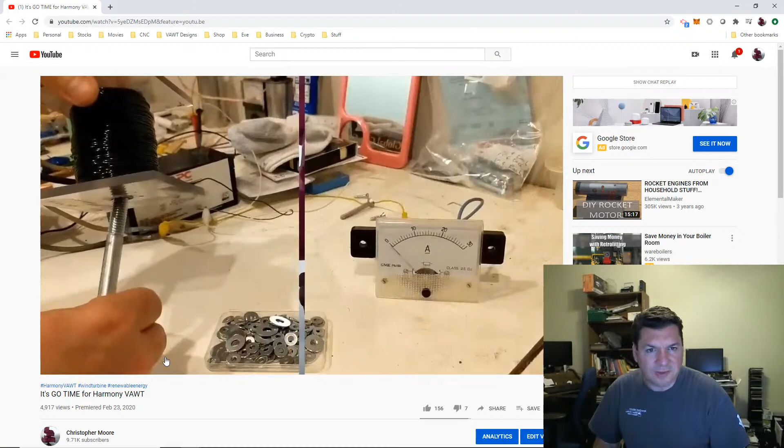Then I went to this one, which was considerably larger — but again, that's just blowing in the wind, there's no generator on that, it's just a proof of concept. And then I went to this much larger version, which I machined everything out for.

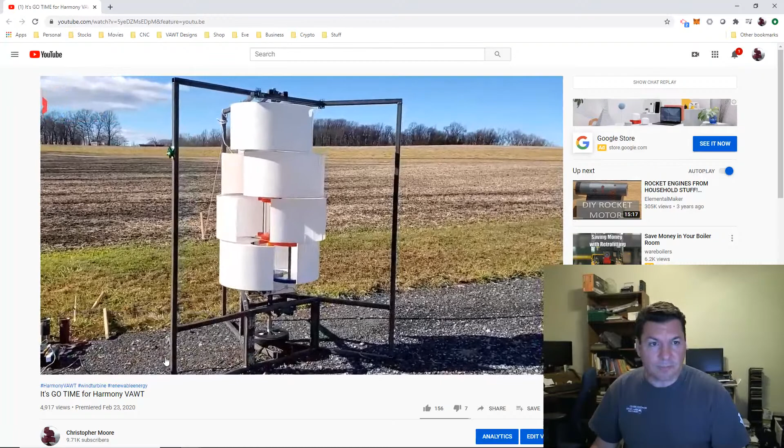And finally, wait for it — here it is, Ray. That's the largest prototype I've made to date. I do have a generator hooked up to it down there, but where I was testing this, the wind was terrible, absolutely horrible. Even though it was supposed to be a good windy day, it wasn't — we only had up to 5-mile-an-hour winds where I was testing, and it wasn't sufficient. So that's the largest prototype I made to date.

The new one that I'm looking to build, Ray, when it's fully open and fully unfurled, will be 6 feet wide and 7.5 feet tall — the turbine scoops.

So 6 feet wide, 7.5 feet tall would be the swept area. That, my friend, is 45 square feet. And when I did the calculations to meters, that's 4.2, we'll call it, 4.2 square meters of surface area or swept area.

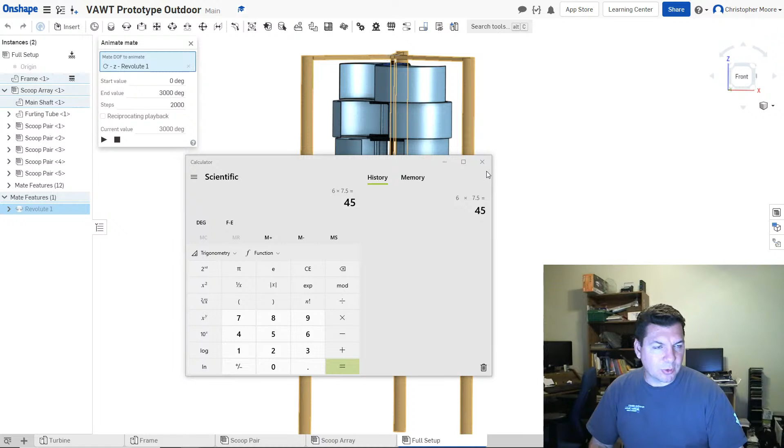So it should be a significant amount of power that this new one can produce. I'm thinking 2 kilowatts in like 10-mile-an-hour wind is definitely achievable, but I don't know yet. Until we build it and test it, I'm not going to brag about what it's going to produce when I have no idea. I'd just be guessing. Calculations show I should easily get that much wind passing through that area. How much Harmony captures, and how efficient it is, remains to be seen. That's work yet to be done.

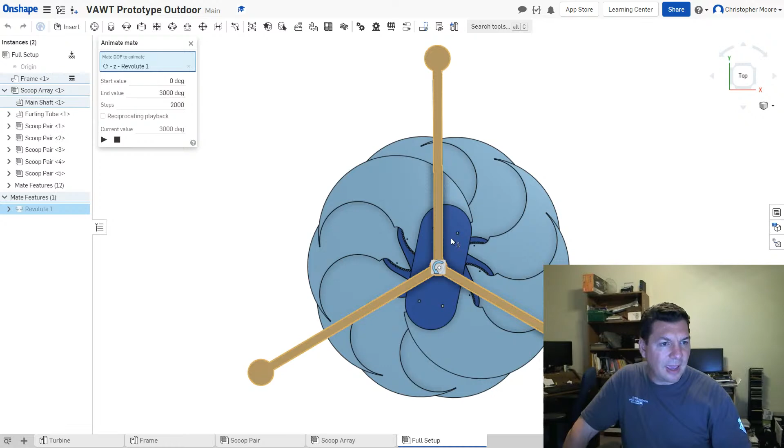What I am talking about doing is a crowdfunding where I go for seed capital to help actually build this prototype that you see on your screen here. These poles are about 16 feet tall, about 8 feet on center, so 8 feet in diameter. That would allow me to have a permanent prototype out front in my front yard for testing. So that's what the seed funding round is going to be for, to help fund this build.

So if you want to be a lot more caught up and on top of where the project's at, watch some of the older videos, and that'll help you along quite a bit.

Okay guys, at this point I don't think I have anything new to put out. I just wanted to show the designs to people, get it out there, let you see everything about it. It's pretty exciting to me. Hopefully it's pretty exciting to you. And it would be neat to work on this together as soon as we start getting seed funding.

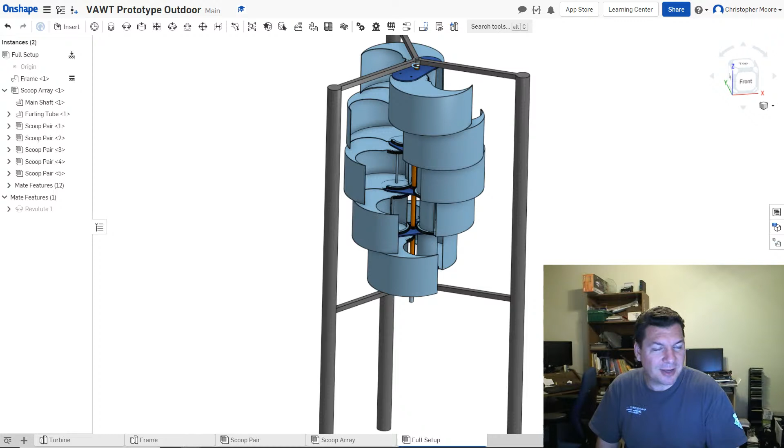Thank you, Don. Yeah, the patents should be arriving. I don't know, they say it takes like 5 to 6 weeks from when the patent office grants everything. So I would expect that I'm going to need to check my mailbox within the next 3 weeks, maybe, and I might find my present in there. I've never received a patent before, so this will be new to me. I guess they just send it to you in the mail. I don't really know, I've never gotten a patent. So we'll see, I'm kind of anxious to see how that works and what they do. But, you know, that's just a piece of paper, really. The real journey is beginning now, and the hard work and everything to make this come to life is just now beginning.

Are you leaving, hon? Yeah. Okay, I don't want to be on camera. Stay over here, you can come be on camera, there's like 20,000 people here. You can be like YouTube famous. Nope, I'm good, no, there's only 7. I'm good, so thank you though. All right, love you. Love you too. I'll see you tomorrow. All right, bye-bye. Bye-bye. All right, guys, thank you.